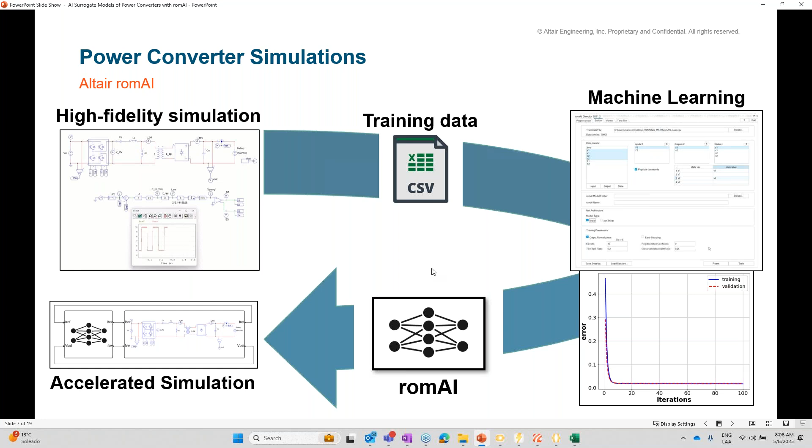And what's the advantage? Once you have that, you will have a modular model that you can plug back into your system simulation, and instead of waiting on the simulation time to finish, just focus on the engineering side of things once you have the reduced order model. So again, why do we want to tackle this? Let me give you a little bit of context.

Power converters are becoming more important every day with electrification everywhere. These things come in many types and sizes, and do many things like changing the voltage from a power source, changing its frequency, converting from AC to DC and the other way around, or between different characteristics of AC or DC. But I want to focus on one specific type that we chose for this example, and that is resonant converters.

These resonant converters are getting a lot of attention because they're very efficient and also they produce low electromagnetic interference. So that's two very good advantages. But another reason why we chose them is because they are highly nonlinear and hard to control. So why did I choose this? Because if we can build an AI reduced order model from a highly nonlinear system, it would probably be easier to model and control some other kinds of power converters, right?

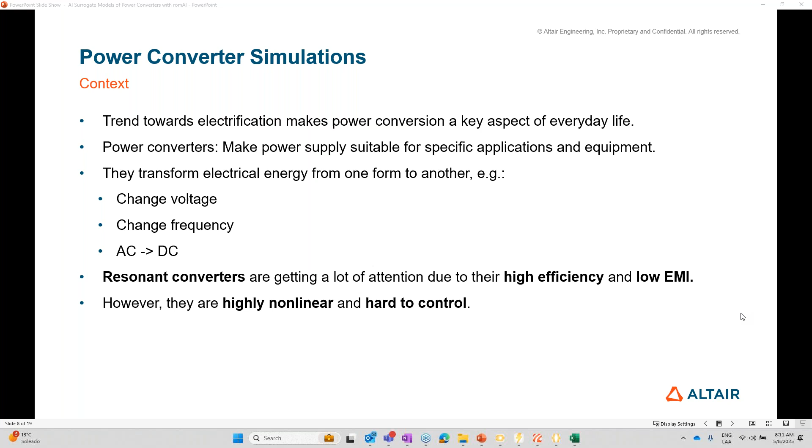Perfect. Thanks, Albert, and thanks everyone for your responses. So we chose resonant converters for this experiment because they are highly nonlinear and hard to control, but they are getting more important every day. But then what's the problem? These things are controlled with very high frequency switching. For example, in the example I'll show, the standard resonant frequency is around 200 kilohertz. So that's very computationally intensive to simulate.

So if you're running simulations over long time frames, or if these converters are not standalone simulations but part of bigger system-of-systems simulations, these simulations become slow, and I mean real slow, painfully slow. So because of that, any acceleration technique that will save us time is very valuable, whether you're optimizing something, designing, validating, or integrating into a bigger scope of simulation.

In some cases, there are simplification methods that don't capture the dynamics, and that's good enough. For steady state analysis, you don't even need to delve into something like romAI. But if you're analyzing how the system responds to load changes, to faults, or different methods of control, then the dynamics are critical. And that is the challenge to keep in mind for this session. This is what we want to do. We want to help you reduce the computational burden of your simulations while still capturing the dynamics.

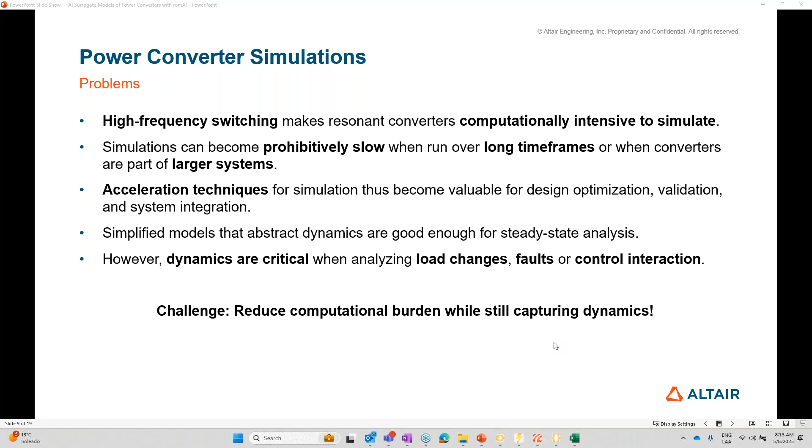And in the end, how do we do it? Just as I showed you. We use a high-fidelity model created in PSIM to create the training data to train an AI model that is going to behave as a surrogate model, which in the end is going to have a very similar behavior. And I say very similar, not the exact same, but just what we need, capturing the dynamics of interest and running at a fraction of the time.

For example, a similar simulation of a resonant LLC converter running 20 seconds of simulation time takes on average more than 45 minutes in PSIM. But for romAI, it takes less than a second. So I hope you already see the value in getting instant results here.

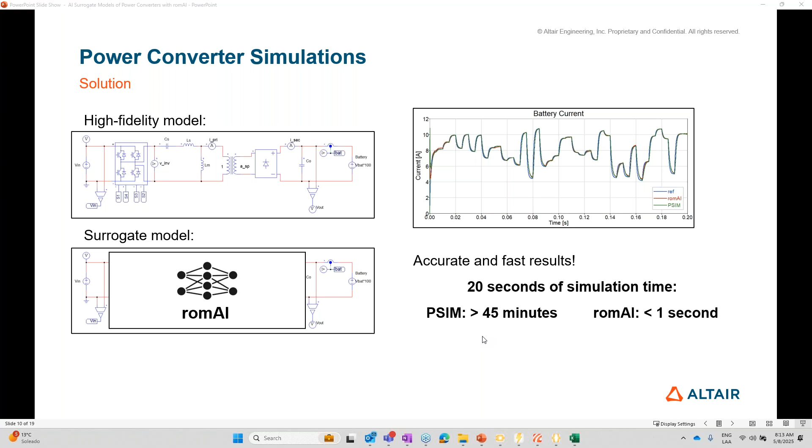The tools that I'm going to be showing in this workflow are all part of Altair, and they're very straightforward to use. I'll show you at a high level what we did with each one of them. The high fidelity model was created in PSIM. Then HyperStudy is a tool for creating design of experiments that I used for running the model I created in PSIM many times, changing the input conditions, changing some parameters, and most of all changing the reference control signal. So I ended up with all the results files from the simulation that I need for building a data set.

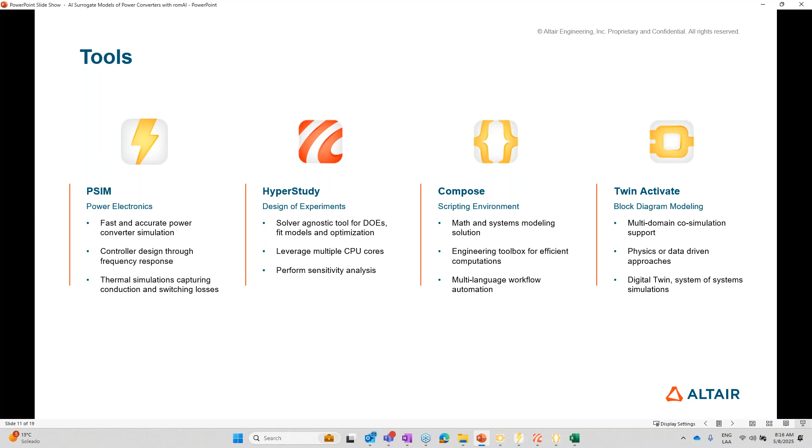And in the end, I also used Twin Activate to integrate everything, also because romAI is a tool that is embedded into Twin Activate. Twin Activate is a tool for systems integration and system simulation, which allows you to put together the high-fidelity PSIM model and the romAI model, as you're seeing right now. So with that out of the way, let me show you step by step how to get to this romAI model.

The model that I started from, here it is in PSIM. It's a full bridge resonant LLC converter, and it's a very simple model. This is the converter itself, and to the right of it, there's a generic load. There's an input voltage, and here on the bottom, you can see the control loop. It is a voltage control loop, and I'm starting off with an initial reference, and then at some point in the simulation, I'm getting a change in the voltage reference. Let me run it and show you how the system behaves.

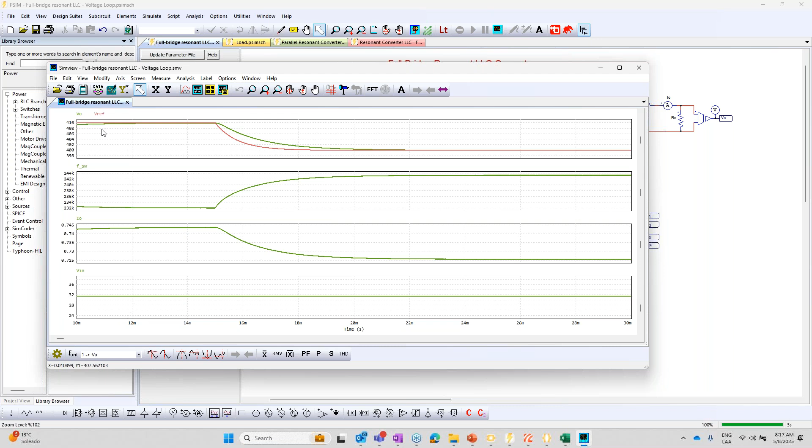In red, you can see the reference voltage. I used a low pass filter to make it easier for the system for reasons that you will see later. And well, it follows the new reference when it occurs. There's a reference here, the reference change happens and it adapts. The input voltage is constant and the system changes its switching frequency, and as a consequence, the output current and the output voltage change to match our needs.

So this is the real thing. This is the high fidelity model. Now that I have this model defined, I jump to HyperStudy to build the design of experiment. I'm going to select the PSIM model that I'm going to run, which I do here. It's the model that I just showed you. And afterwards, I choose the variables that I'm going to explore over.

Basically, it's going to be the input voltage, the voltage that is over here in this source, and the initial voltage reference, and then the reference voltage step. That is the initial value that it should provide voltage at, and then how much it's going to change. I have some other values here which I use for controlling the simulation, like the time at which the change is going to happen, the total simulation time, and when I will start printing the results for my results file, for the dataset, for reasons that you will also see next.

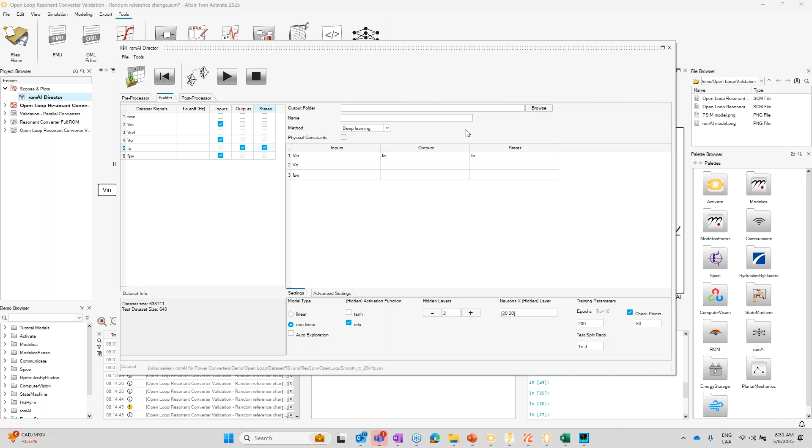So yeah, that's it. With that, I would just need to select an output location and the name for the reduced order model and click play, and it would start training. This takes a little while. It's a big data set, so a bit less than 30 minutes. So I'm not going to go over it right now, but I'm going to show you now how the model I trained performs. I'm going to use this data set now for analyzing the results and seeing how the model works. Why? Because this is totally fresh data.

I trained it with 40 simulations. Well, I created a data set with 40 simulations for training. I filtered out the signals that had ripples. Then I kept another data set with 10 runs just for testing afterwards. And now let's see its performance.

When you finish the training of a reduced order model here in romAI, the post-processor tab is going to load automatically, and you'll be able to see this plot first. This is the loss and how it was reduced over all the epochs. Remember, I trained for 200 epochs, but in the plot I'm seeing here, the ROM that I chose, the one that performed best, was only trained for 50 epochs. That's not always the case, but I always recommend saving snapshots just to be sure and be able to pick the best performing one. The loss was steadily decreasing, and in the end, there was a test loss calculated on the actual results after the model was trained.

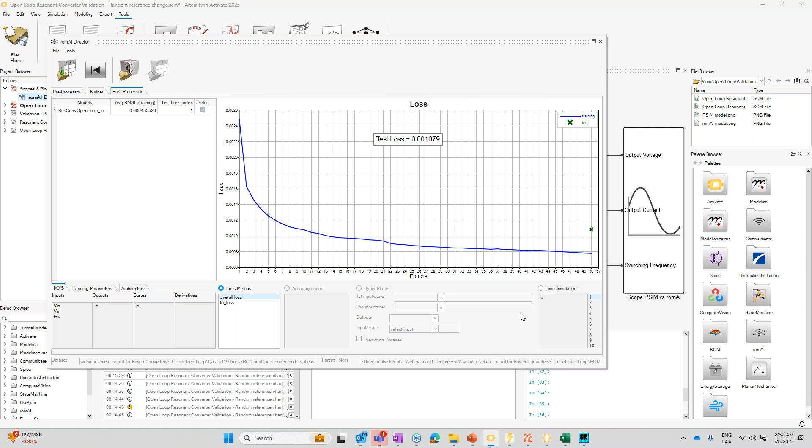But always, when I'm using this tool, whose purpose is to run system simulations, what I found more useful, more than metrics, is just looking at how it would perform compared to the real thing. So now I switched over to time simulations here, and I have the 10 different simulations that comprise the validation data set. And you see in green the real response that it should have, and in blue the actual response from the AI model.

You see that sometimes it's almost identical, sometimes it has slight changes, sometimes it might even do a poor job. Let's look for the one that performs the worst. This one doesn't perform really well. Now, what do I want to highlight here? That this is not magic. Not that I think that this is not a useful tool. This is an amazing tool.

I love this thing. But as you'll see, we want to have something that captures the dynamics at a well enough level, because when you plug it into a bigger systems integration, all of these discrepancies go away. If you capture the dynamic behavior well enough, you're going to be able to do what you want to do. If you have a look at this y-axis, the difference is minimal, right? Less than 1 ampere in difference, and this is the one that performs the worst.

And I have to clarify that I've trained this one properly. You may end up with some models that do not capture the dynamics properly, but that's why there are some guidelines that I want to share with you to ensure that even though this is not magic, it's an extremely useful tool that you will love if you use it appropriately.

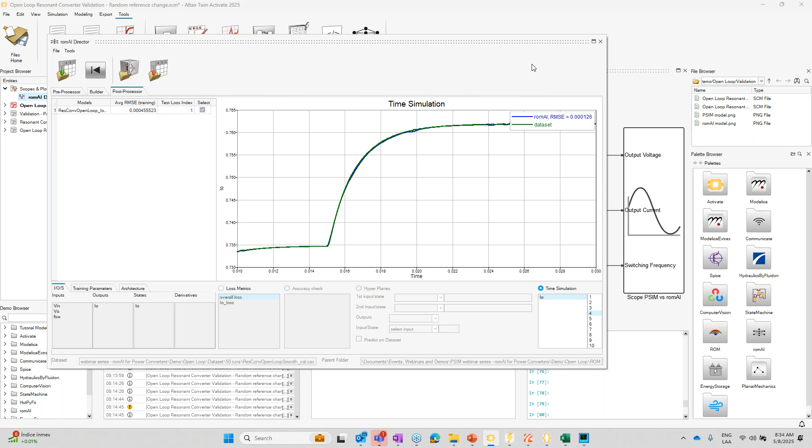So once I have the model ready, what's the next thing to do? The model is ready here with the results, but you will end up actually with something that looks like this, a folder. And that is when you're ready to plug it into a bigger system simulation. Let's jump back here into Twin Activate and let me show you how that is done. Let me click into this system, and this is the surrogate model that I've trained. Once you have your model, you put in a block like this in Twin Activate and you select the folder that contains the surrogate model that you just trained.

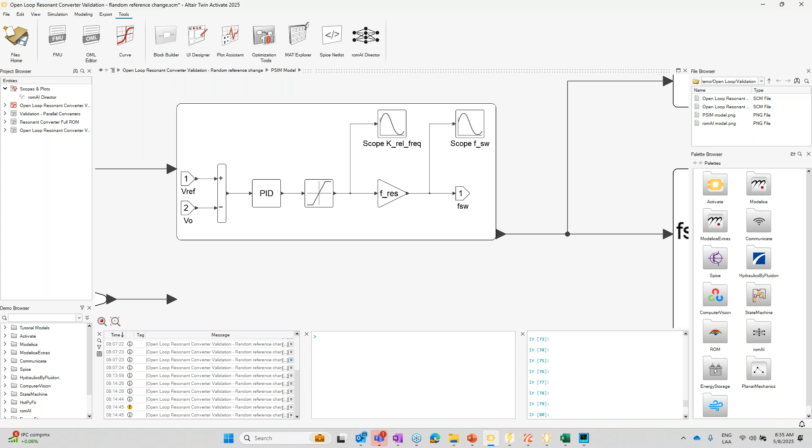As you will see, it has an independent controller from the high-fidelity model that is exactly the same as the other controller. So both the high-fidelity model and the surrogate model are controlled with controllers tuned exactly the same. And you will see that there's also a small PSIM block over here. That is because this model predicts the output current, but to predict the output voltage, I'm still using a much simpler PSIM model that, given a current, calculates the voltage.

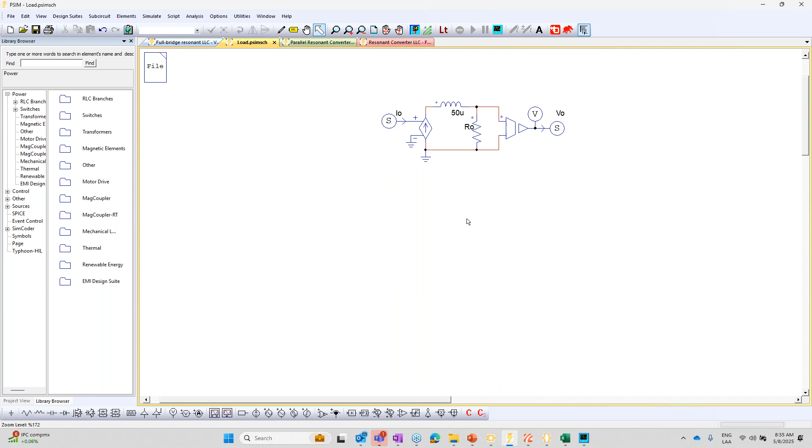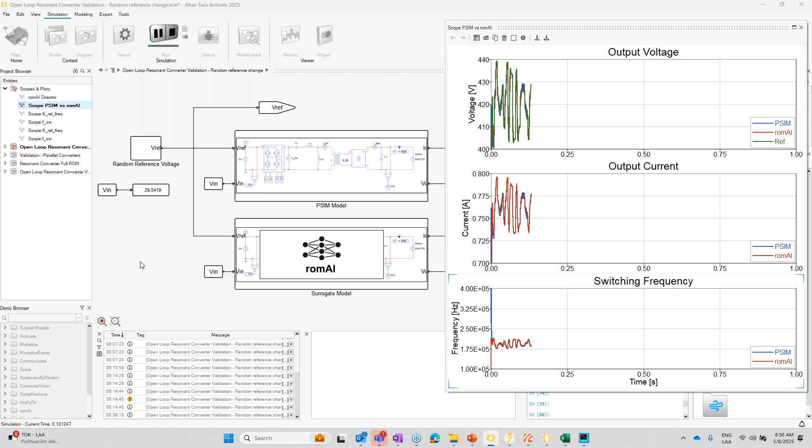So that's very straightforward. On the other side, the full PSIM high-fidelity model is here, the thing that I showed you in the beginning. So that's why we have the high fidelity on one and the reduced order surrogate model on the other one. Let me refresh and run again. Now you have a little bit more context of what is happening here. I've explained how to build the reduced order model, and as we discussed earlier, is this a perfect replica of the high-fidelity thing? It's not, but for a systems level model, maybe it's what you care about. If you're analyzing how it responds to a fault, battery charging, or you want to simulate over longer time frames, all of that becomes extremely valuable.

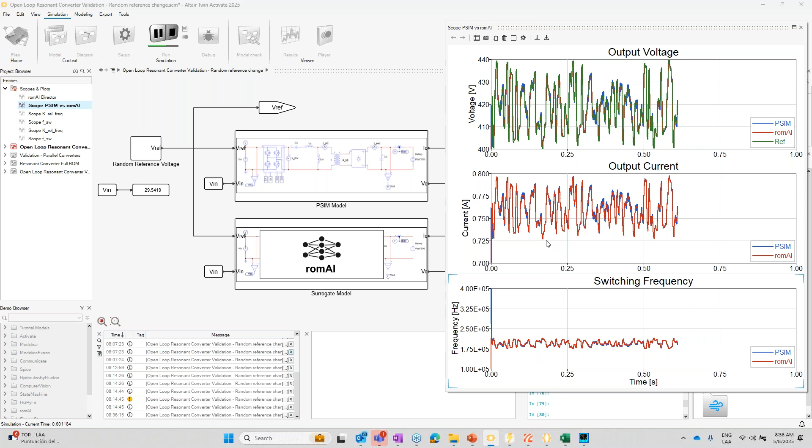Let me zoom in once again. Let's now do it on the switching frequency. Remember, the switching is getting created by different controllers. They're tuned exactly the same, but acting on the response of the different systems. And you will see that, ignoring the ripples, it's matching very, very well. And then again, if I turn it off, instant results. That's the real value of romAI.

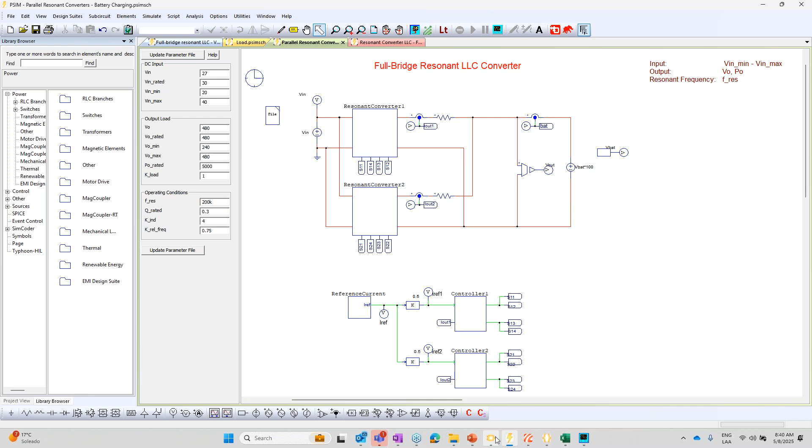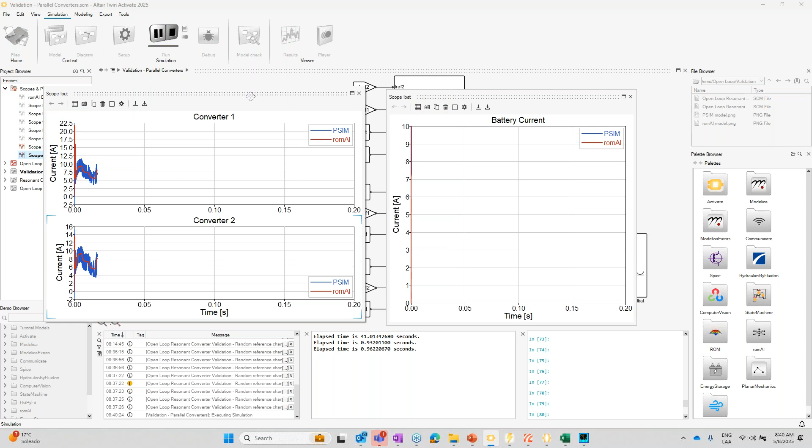The plots that you see here, I built training a romAI model from something like this, one parallel converter here, another here, charging the same load. And what you end up with, let me open it over here. What you end up with here is something that, well, we have side by side the two romAI models that represent a converter each, and we have the high fidelity thing over here.

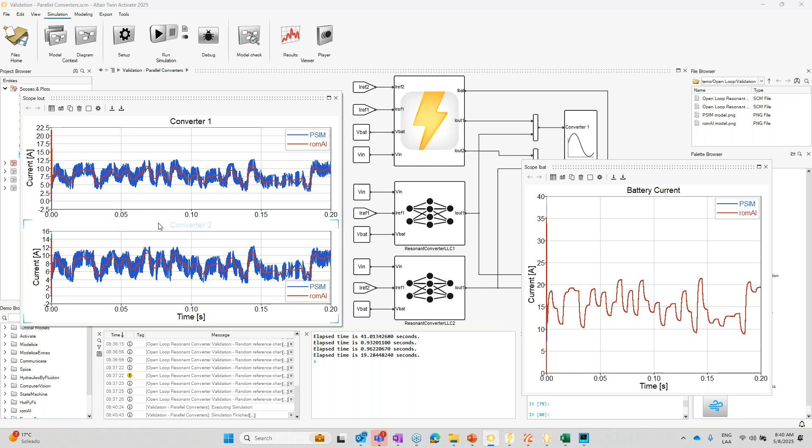And you end up with something that, again, doesn't capture the actual ripples and the sort of fight between the converters to provide power. But in the end, when you add them up, you get a very similar behavior. Look at how similar these things are. And again, if you turn it off, instant results.

Oh, this one, I shouldn't have clicked again on the past one because now it's simulated again, but it was a funny thing in which sort of one of those reduced order models diverged. So I wanted to highlight that as an example of how this is not magic. This is sometimes going to provide results that are not actually accurate to all general applications or scopes of projects.

But what I mean by that is you cannot train a reduced order model to capture all the dynamics and to capture at 100% fidelity this thing. If you did, then it wouldn't be a reduced order model. So the thing is, keep it constrained to the things that you're interested in, and you're going to be able to predict results much faster at a good accuracy. What other things have we explored?

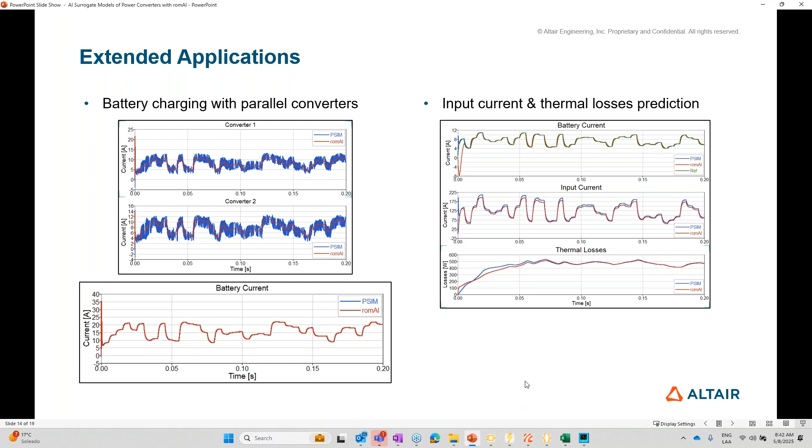Well, in this plot that you see to the right, the one to the left is the one that I just showed you, but the one to the right is one in which I predicted not only the output side of the converter, but also the input side, to make it an equivalent circuit providing the accurate dynamics to both sides of the converter. And I also used PSIM's thermal module to predict the thermal losses. Let me show you how that runs.

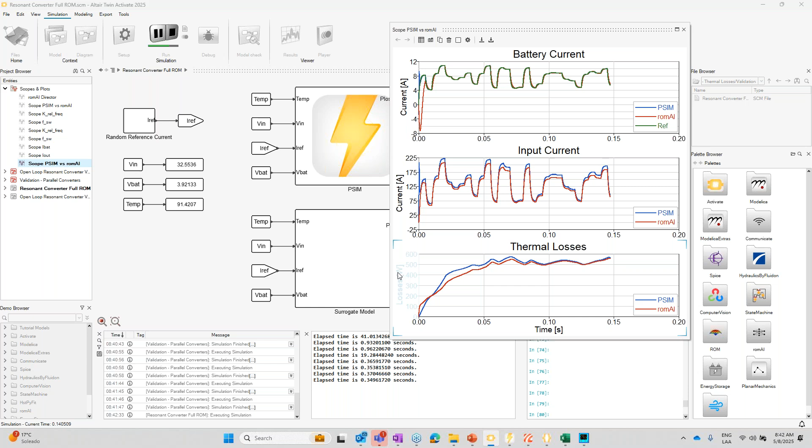You will see that there's an initial divergence. If you've been looking thoroughly enough, you have noticed that there's always an initial divergence. I'll explain why that is the case next. But afterwards, it performs really well. I'm simulating for 200 milliseconds. You see the results match very closely both on input, output current, and the thermal losses.

And if I turn it off, again, instant results. You can see that it takes a little bit of time for the output current to actually match the reference because there's this initial divergence that I'll mention. But yeah, I hope you can see the value. This one was built from a converter using PSIM's thermal module, as I said, more complete integration.

And in this case, there's a very important thing going on. It is that we're separating tasks between romAI models. One romAI model is in charge of producing one of the predictions. That's a very good tactic. You can bundle these things together. You can put them sort of in series even, and you can build more complex models, far more complex than what a single romAI model would allow you to do.

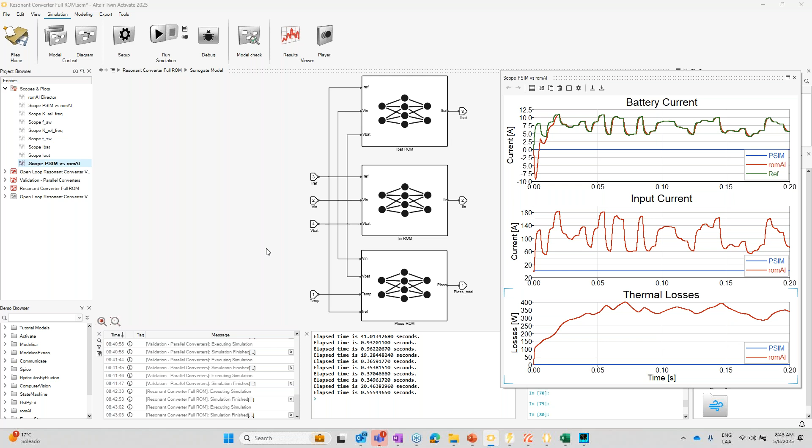The user just needs to know, with the slightest bit of systems theory, which signals are your inputs, which signals are your outputs, and which are your internal states. This might be the trickier question because there's no single possible answer. And then building a very simple neural network, and I showed you again, very simple, 2 hidden layers, 40 neurons in total between those 2 hidden layers.

romAI builds a model that captures the underlying dynamics, and that has 3 huge advantages. The first advantage is that you're not predicting the response itself. You're not matching the response that you trained it on itself. You're instead matching the underlying dynamics. So because of that, you're going to be able to run extended time simulations.

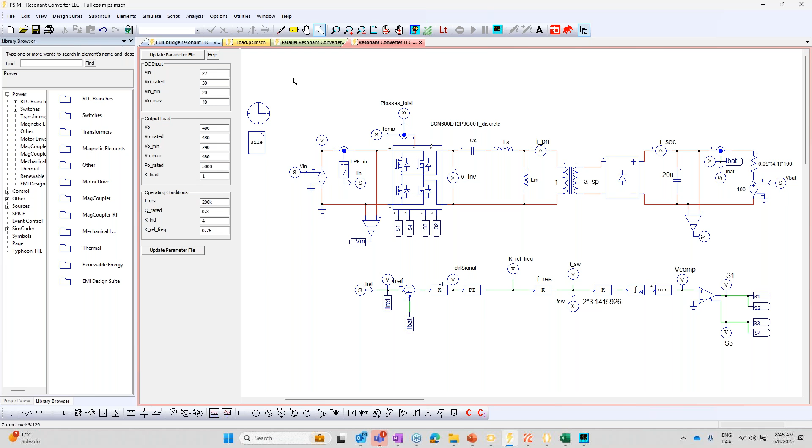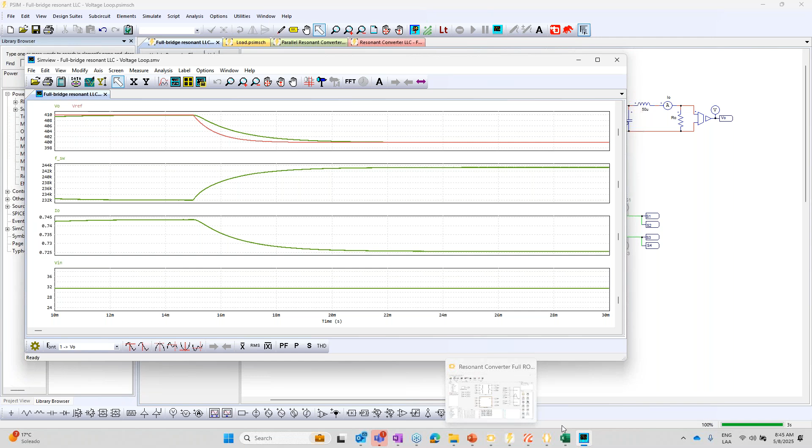You already saw that, or if you didn't see, the simulation I showed you at the beginning, the original converter I showed you the process of, and the results, these were simulated for 30 milliseconds. But I can easily simulate for more than that, for 200 milliseconds, 1 second, 20 seconds, because romAI captures the dynamics, not the response itself. If it captured the response, it would struggle simulating farther than what it was trained for.

Another huge advantage is that it can perform well without using a huge data set. Other traditional approaches would require lots and lots of different simulations, varying parameters slightly, to give this impression of a continuous space of parameters. So the huge advantage of this approach as well is that you don't need much.

Creating my dataset took less than 3 minutes to run, because I ran 50 PSIM simulations. And with those 50 PSIM simulations, I took 10 apart for validation, and the remaining 40 I used to train. And that was good enough. Other approaches would require far more data.

And the last advantage, which is also huge, is that it performs really well both inside the design space and also outside. You can extrapolate the conditions on which you trained a little bit, and it will also perform well enough. Again, it's not magic, so you cannot extrapolate infinitely to totally different conditions, but to some extent you can.

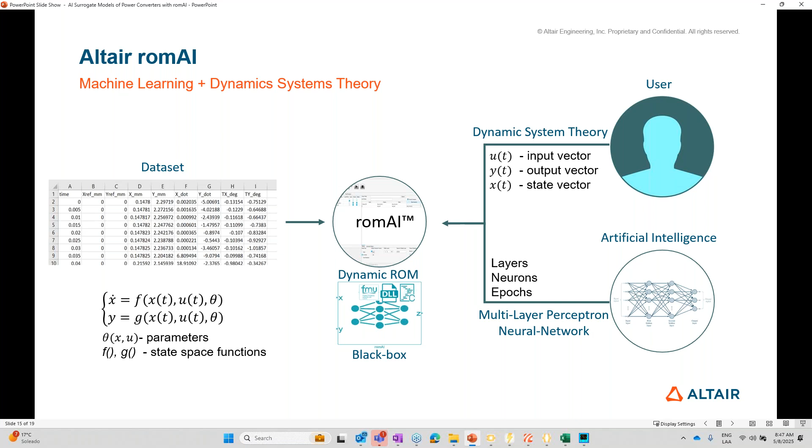So Rafael, there was a question, and maybe I answered it incorrectly there. The last one there from Anand: can we build a digital twin model to predict target variables by combining simulation data and test sensor data? And I mentioned that we could mix test data and sim data for sure, but I was a little bit more hesitant about predicting values outside the trained data set with regards to that extrapolation. Maybe can you expand on that a little bit more?

Yeah. Well, as I see the question right now, let me address that. It's another common application, instead of trying to predict actual outputs of a physical system, sometimes these things are used as observers. We can estimate internal states of the system. I mentioned that because you can turn around romAI in clever ways to give you exactly the information that you need about a system. But also, as I said, this doesn't predict the actual output itself, but the underlying dynamics.

And if you have the underlying dynamics, let me put it as an example. Here, I trained for an output voltage between 440 and 400, if I remember correctly, because its nominal output voltage is 420. I would still be relaxed when testing over 445, 450 maybe. Would I test low output scenarios? No, I wouldn't. I wouldn't test no load scenarios. I wouldn't test input voltages far below 1/2 of what I trained it with, things like that. But it's commonly used outside the training scope.

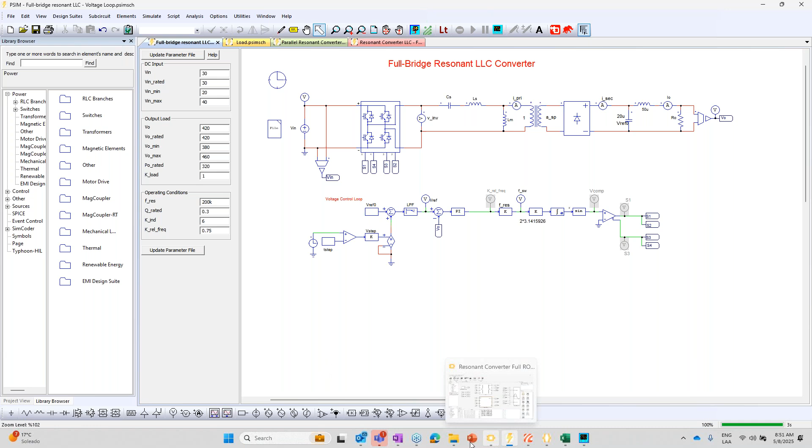Yeah, perfect. So yeah, romAI is very widely used for digital twins as well. So again, good practices that we've learned along the process. I'm finally going to address the small divergence that you see at the beginning of simulations. So again, iterating for the 100th time, this is not magic, and you have to make the job for romAI as easy as possible.

If I started training from t equals 0 of the simulation time, when the converter ramps up, there's a spike. Here you can see a spike current coming from the high fidelity model, and then it settles and follows the reference. It was way harder for romAI to capture both the initial transient and also the initial spike.

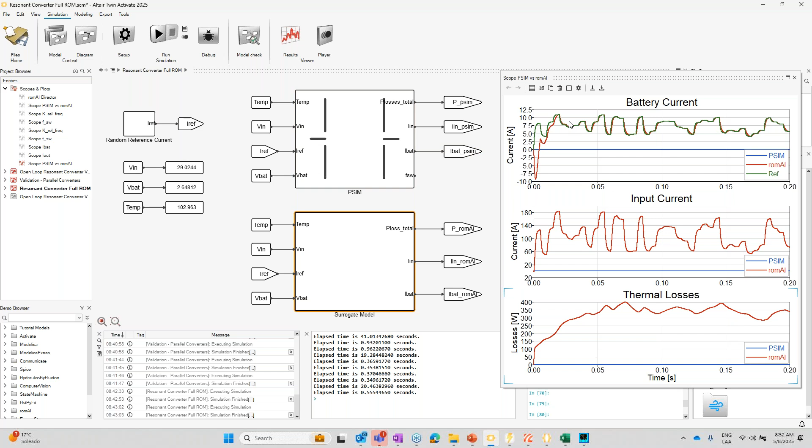So because of that, I decided to trim all the results before 2 milliseconds. Everything before this line was ignored for training. And you can see that's why it takes a little bit of time. I think I used another approach for this one that models losses, but let me jump to the one I showed first. Let me turn it on. This is the one I showed you the full workflow.

Let me stop. You see that before 2 milliseconds, there's a slight divergence between PSIM and the romAI model. So that's why we didn't include the initial transient, to make the training easier. Then again, this is totally feasible if you're interested in the behavior once it has started, if you're analyzing simulations which are already at a steady state, and then analyzing faults, changes in reference, whatever.

There's also a good trade-off here between the time frame to simulate for and the training duration. You have to keep that in mind. The shorter the simulation time, the faster the training, but that might not capture the dynamics that you want well enough. Maybe you need a lot of time settled in a steady state for it to capture how the system performs at steady state.

Small models should be used. I already mentioned this, so I'm not going to delve so much into it. But there are several rules of thumb: a good measure is between 2 and 4 layers, and 20 to 40 neurons per layer. In machine learning and deep learning especially, these rules are not fixed. Always feel free to explore further. But I recommend starting with a model looking like this.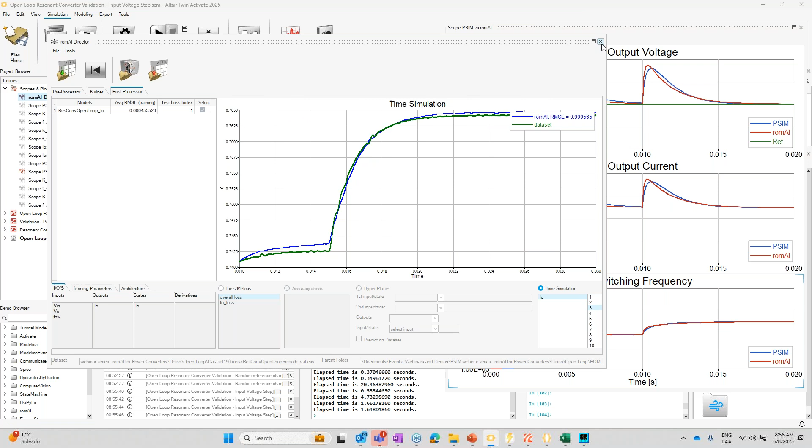Last, apart from the good practices we've shared, there are some principles that we've learned. We were able to train models in open and closed loop systems already. The parallel converters that I showed you were trained in closed loop, that is, capturing the dynamics of the controller as well. So these models just follow the reference that you give them.

We have found out that there are good practices for choosing the internal states, mainly the switching frequency if you're simulating closed loop systems. But if you're simulating open loop systems, the output itself is the best thing that you can choose. As I just showed you, there are other conditions like abrupt input changes that you can test in those simulations, even though you didn't train it explicitly for that.

But yeah, you can see that we've done a lot of things, and we encourage you to go try it for yourselves. And there are a lot of things to still finish defining. What's the absolute best way to model this? Closed loop, open loop, probably depending on your needs. Which signals to take as inputs? Which structure for the neural network would actually be the best one to use?

What's going on with the starting transient, and how can we manage to capture a reduced order model that is able to perform well on both? Those are things that we're still working on. The optimal data set size: we can make it smaller and it probably would work and accelerate the training. We could probably make it bigger as well. What's the optimal time step? And yeah, there's a lot of things to be explored, though there are a lot of good results that have been obtained from romAI for power converters already.

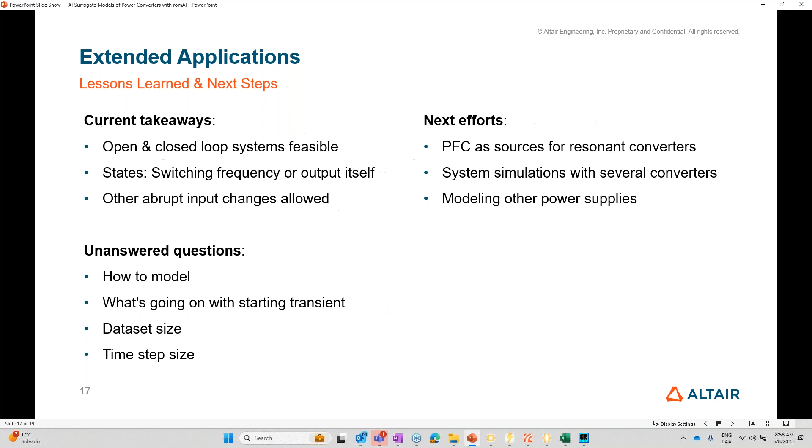And there are next things that we want to try out, namely putting more realistic input converters like PFC converters as sources for these reduced order models that we're creating, involving these in bigger system simulations with lots of converters, different kinds of converters being modeled as well. So yeah, exciting times for romAI and power converters, with lots of opportunities to try things and accelerate your simulations further. So Raf, with that, there's a question for you from Ignacio in the chat.

If you want to read it out and then answer. Perfect. Hello, I have two questions. The first one is, if you can explain again the concept of state variable when selecting the signals for training the ML model. Well, the state that you have to choose is any internal state that you know about your model that shouldn't change abruptly. That should be a continuous signal. Because given state space representation and dynamic systems theory, as long as you know your internal states and the input at any moment, you know the output.

And this has to be chosen sort of by trial and error if you're not sure, testing around many different configurations. But anything that has or should have a continuous signal as its behavior and gives you a little bit of insight on what is going on in the system is a good choice as a state variable. There could be several state variables as well.

And addressing the other question: as far as I understood, the ML model you used is a fully connected model with only inputs and outputs. So what do you mean by states? And my second question is if you can use recurrent neural networks for the reduced order model. Okay, the state, again, is a sort of signal, specifically talking about how romAI uses it. It's a signal that is going to get used for scoring and has to keep a continuous behavior. And when I say scoring, every iteration during training, it's getting tracked as well, and it's getting associated with the inputs and the outputs.